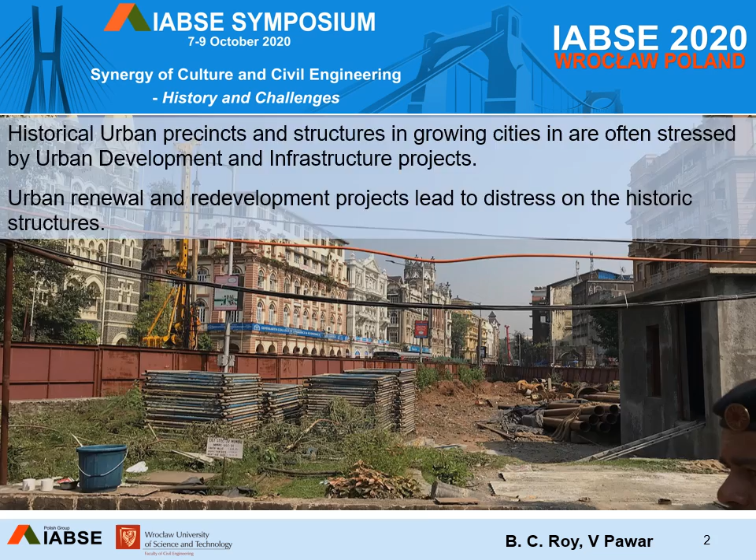The first metro in India was commissioned in Calcutta in 1984. Delhi metro started in 2002 and Mumbai metro started in 2014. Currently, metros are in operation in 10 cities, under construction in 6 cities, and in planning in 18 cities.

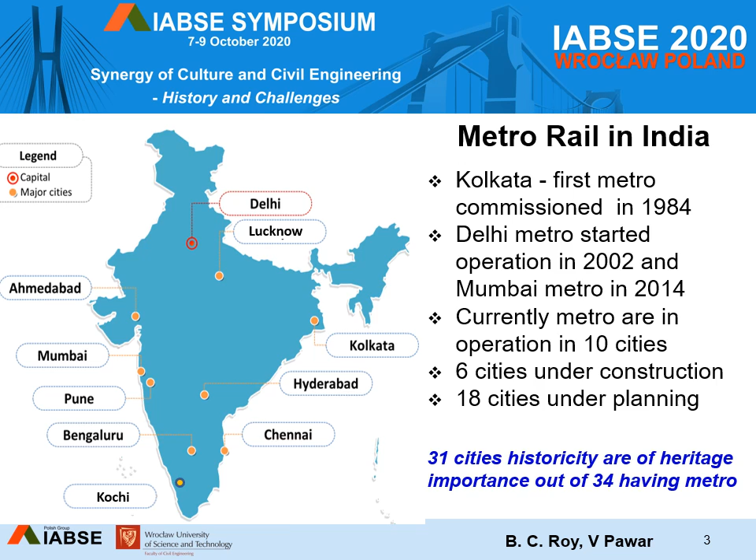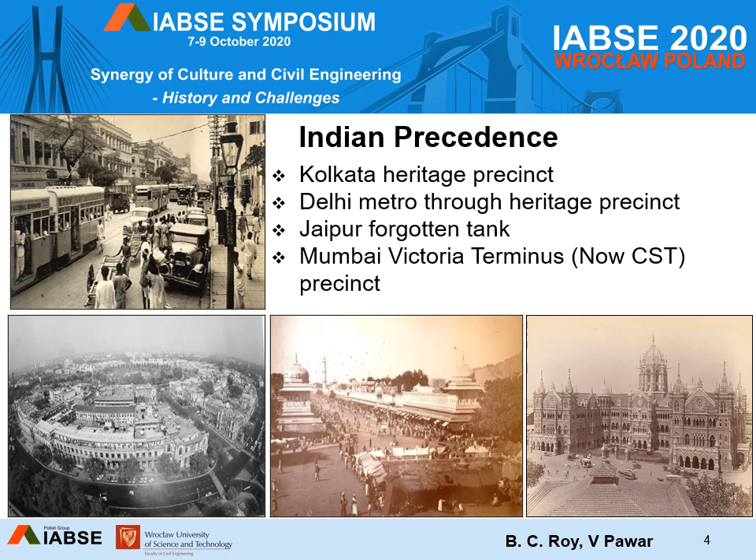Kolkata Metro is routed through historic and crowded streets. For Delhi Metro, many stations are through or near significant heritage. Jaipur Metro, where the conservation approach discovered and presented to the public a forgotten stepped water tank, and the 32-kilometer long underground Mumbai North-South Metro passing in proximity of World Heritage Structures.

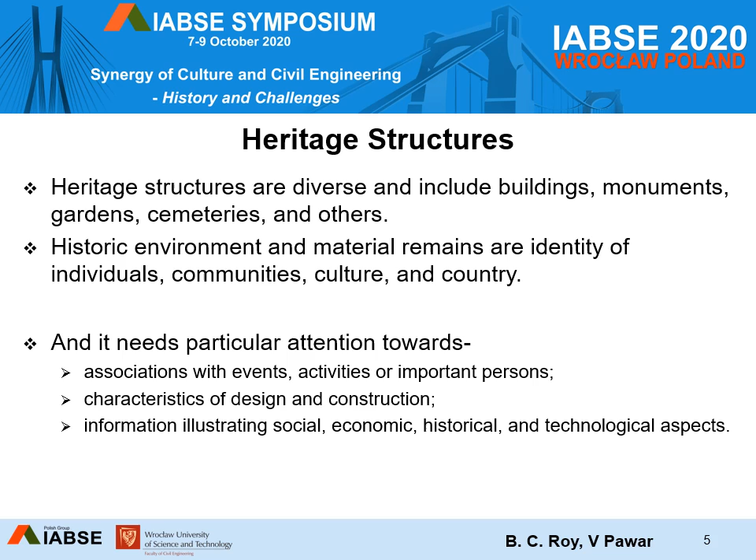Heritage structures include buildings, monuments, gardens, cemeteries, and others. The historic environment and material remains give identity to the individuals, communities, culture, and country.

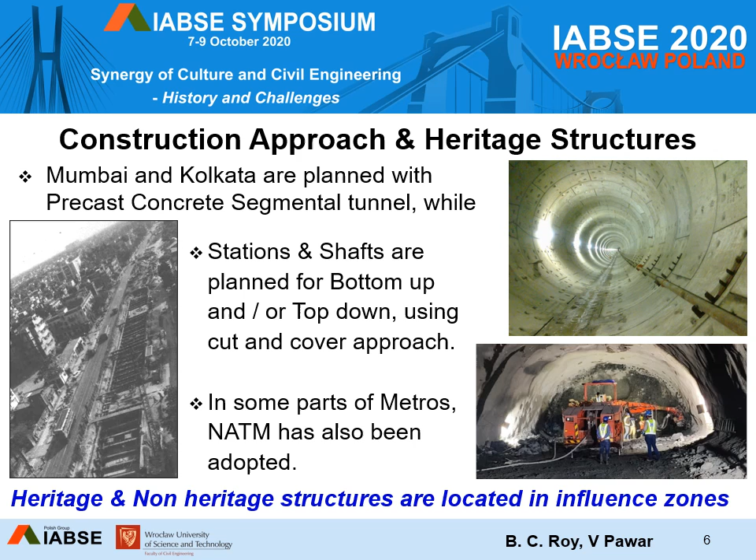Corridors for Mumbai and Kolkata Metro tunnels are planned with precast concrete segments, stations and shafts using cut and cover, bottom up or top down, and also using NATM. Selection of the appropriate tunneling method is commensurate with geotechnical conditions, with protection of existing structures.

The Kolkata tunnel is through soft silty clay, while Delhi encountered weathered quartzite and alluvium. The Jaipur tunnel is through brittle sandstone, while the Mumbai tunnel is through a stable basalt layer.

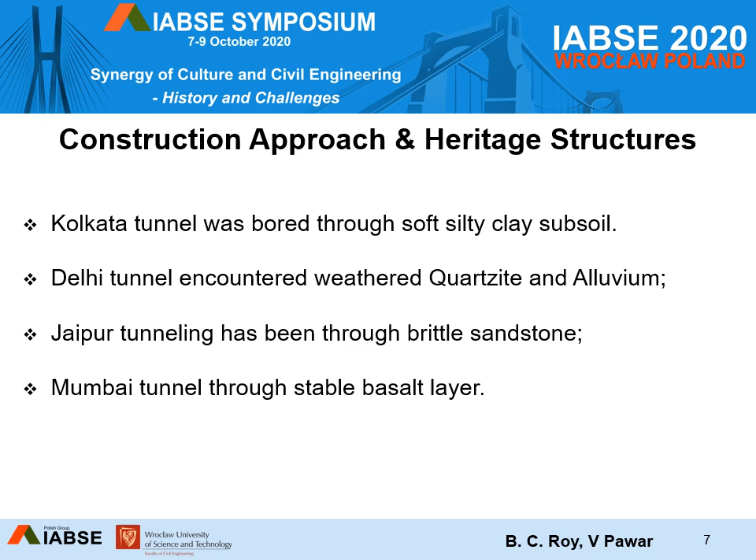Buildings were built using varied materials like brick, sandstone, basalt with steel and timber composite structure, and styles reflecting a diverse eclectic range. On this road, the business and activities include banking, legal and related services, logistics, camera and related optics and electronic equipment, hotels, departmental stores, cinema theaters, schools, colleges, hospitals, and whatnot.

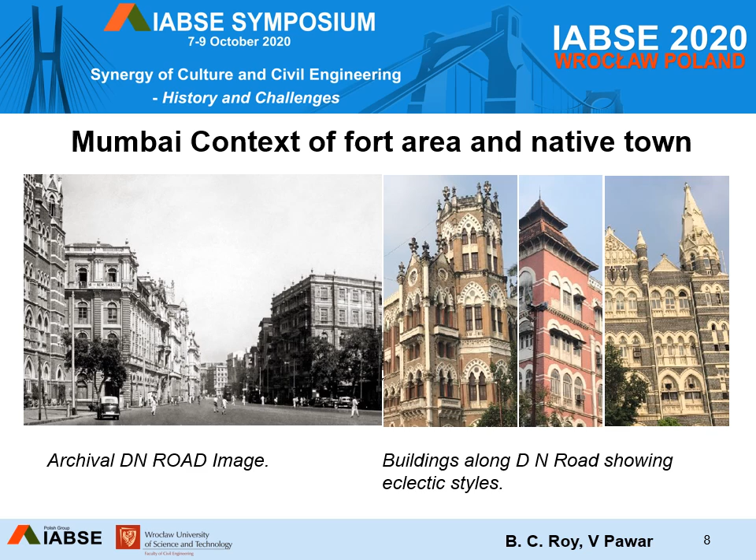Role of conservation professionals: first, evaluate the significance of heritage. Second, ensure policies and advocacy in decisions. Third, conservation of heritage ethically, scientifically, and professionally. In practice, conditions range from political to economic, social to ecological, and to technical.

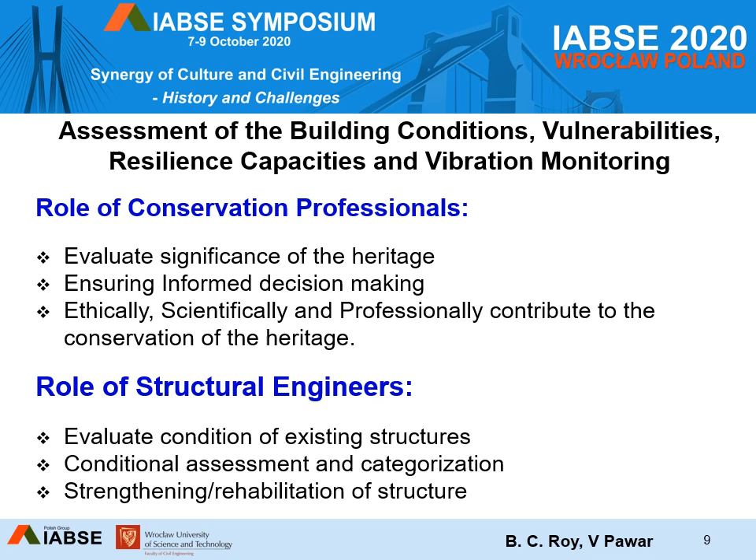For engineers: evaluation, assessment and strengthening of existing structures, assessment where damage, distress or deterioration is suspected or known. It is important to record the history of the structure, behavior and movement over time, and effects due to seasonal changes. Pre-construction photos, videos and test reports are crucial to establish the condition.

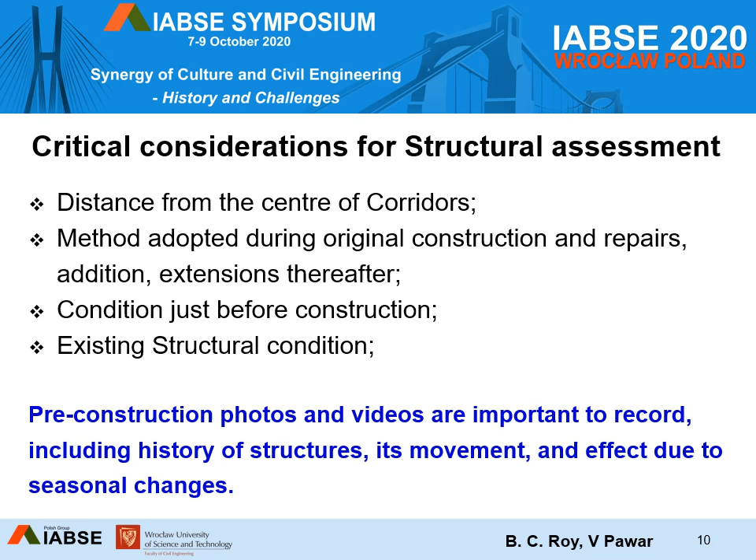Assessment where damage, distress or deterioration is suspected or known. Damage may be caused by leakage, aggressive environment, fire, impact, earthquake, severe weather, and where vulnerable materials are used. For heritage structures, the categories are grade 1, grade 2A and 2B, and grade 3.

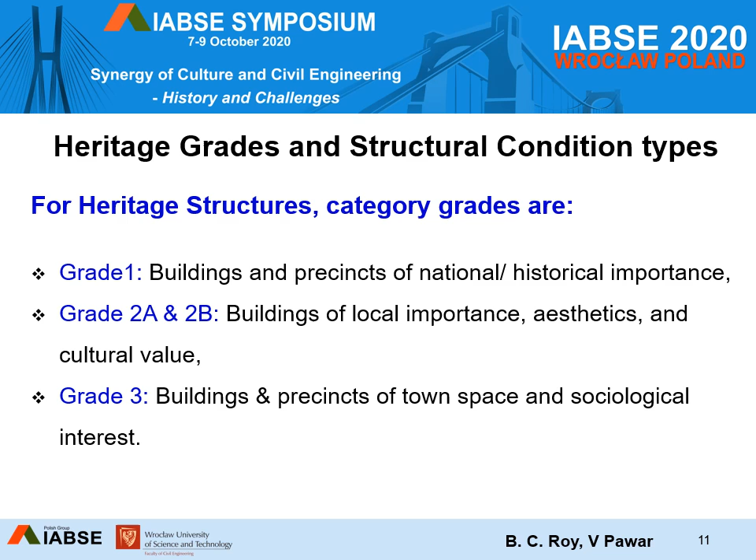Grade 1 includes buildings and precincts of national and historic importance. 2A and 2B include buildings of local importance, aesthetic and cultural value. Grade 3, buildings and precincts of townscape and sociological interest.

Heritage structures' structural condition types are of 6 types. Type 0 is practically non-structural, with non-structural cracks. Type 1 very slight, type 2 slight, type 3 moderate, that is minor cracks, sporadic spalled concrete and seepage. Type 4 severe, type 5 very severe, that is badly deteriorated load bearing structures.

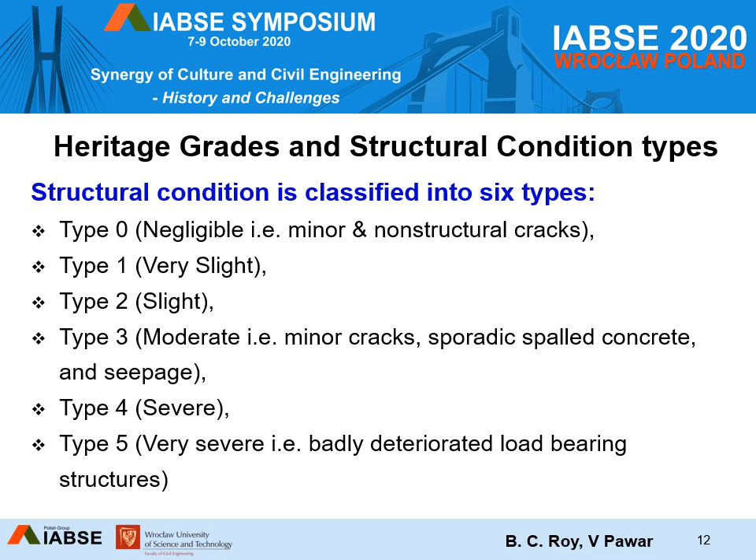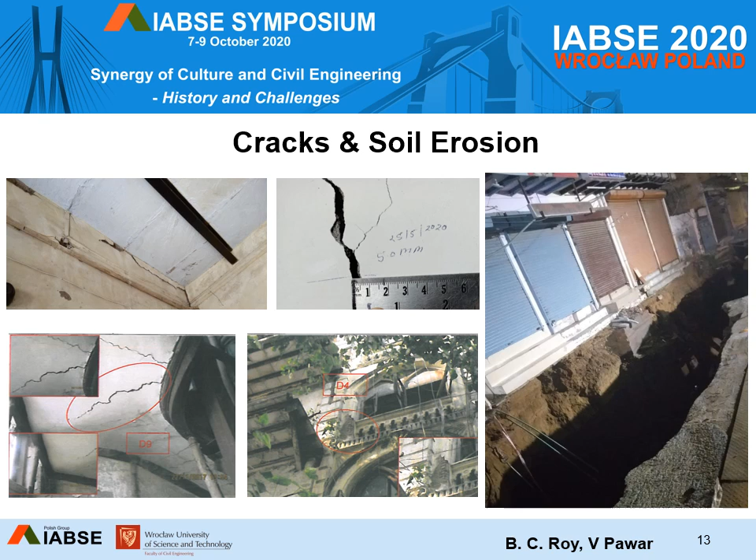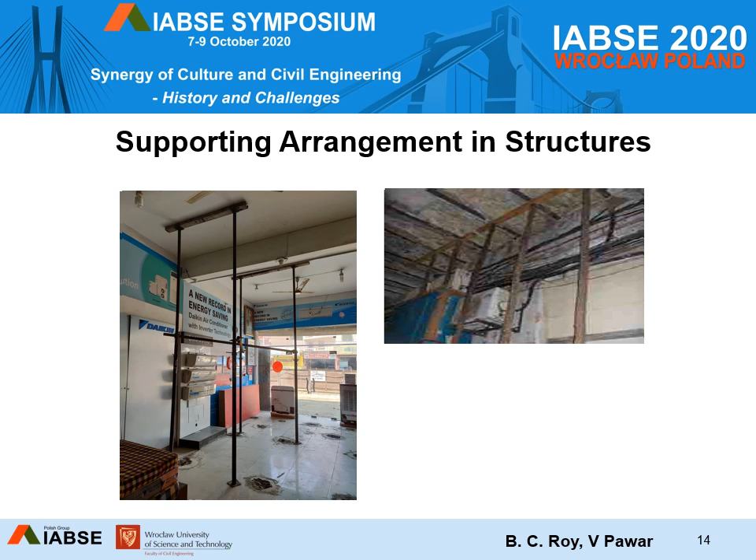During the condition survey, this being a multidisciplinary activity, professionals from all disciplines like architecture, structural, general civil, utility, electrical and power should work in tandem. Strengthening of support structures for existing buildings affected by excavation or tunneling, in situations where there is an imminent risk to the public.

Structural engineers and service engineers should contact the concerned authorities, brief them on the situation, and soon hand over a note highlighting the risk.

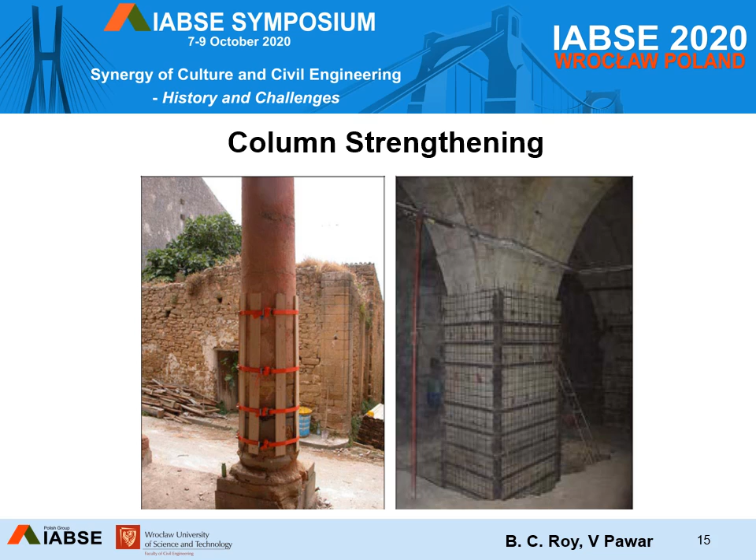The effect of underground transport system on both heritage and non-heritage structures is twofold: one during construction, the other during operations. And the possible damages are assessed as architectural, functional, and structural.

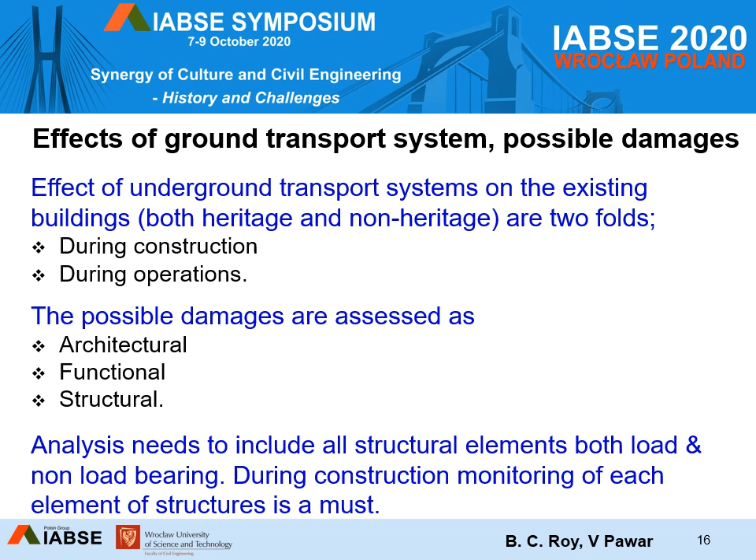Reasons for assessment, objective, methodology, anticipated difficulties, limitation of findings and deliverables. The analysis needs to include all structural elements, both load and non-load bearing. During construction, monitoring of each element of structure is a must.

Monitoring was carried out to control deformation of tunnel, ensure precise tunnel profile, evaluate appropriateness of TBM and tunneling method, assess settlement pattern both during tunneling and excavation, effect of groundwater level, and measure structural stresses.

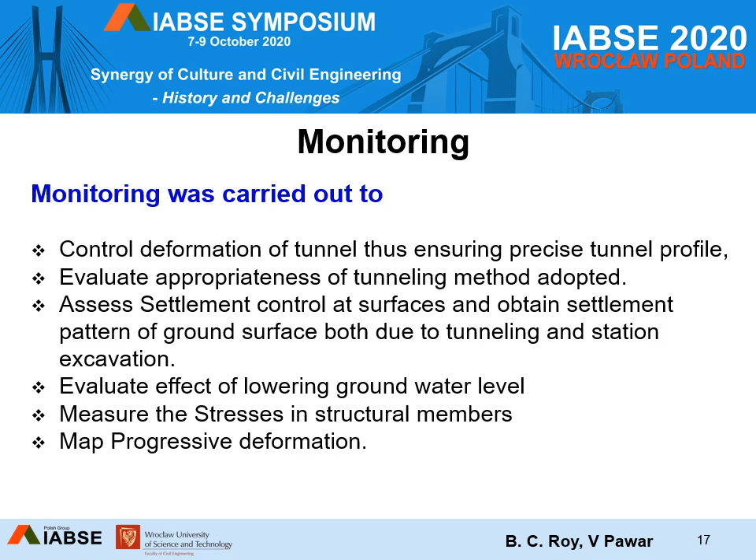Now, the assessment of effect of settlements. There are three stages. Stage 1, structures for which predicted settlement is less than 10 millimeter and the ground slope is less than 1 in 500 need not be subject to further assessment. Stage 2, structures with potential risk to exceed stage 1 were assessed individually using the limiting tensile strain approach.

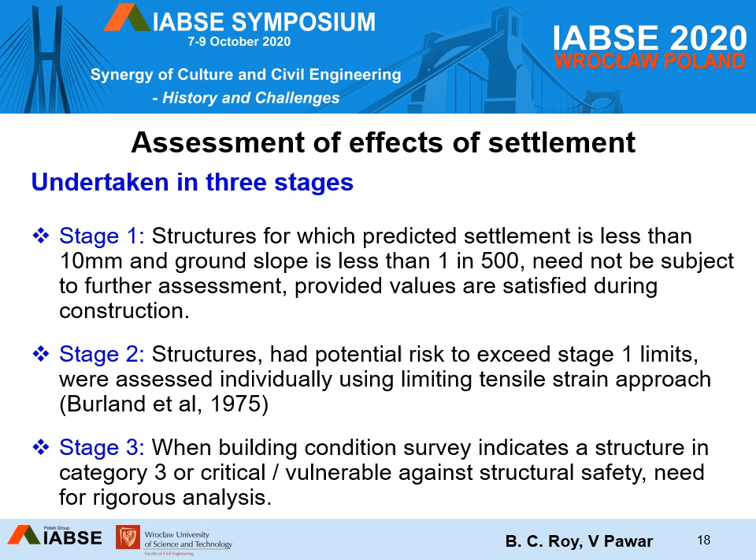Stage 3, when the building condition survey indicates a structure in category 3 or critical, vulnerable against structural safety, there is need for rigorous analysis. Effect of settlement has already all been discussed.

And now heritage conservation scope. Compared to survey, the archival data is more reliable since it incorporates buildings' arcade footprints, including the street features and building heights. Ground truthing was carried out to incorporate changes done over time since archival maps were prepared. It was used for virtually recreating the heritage character.

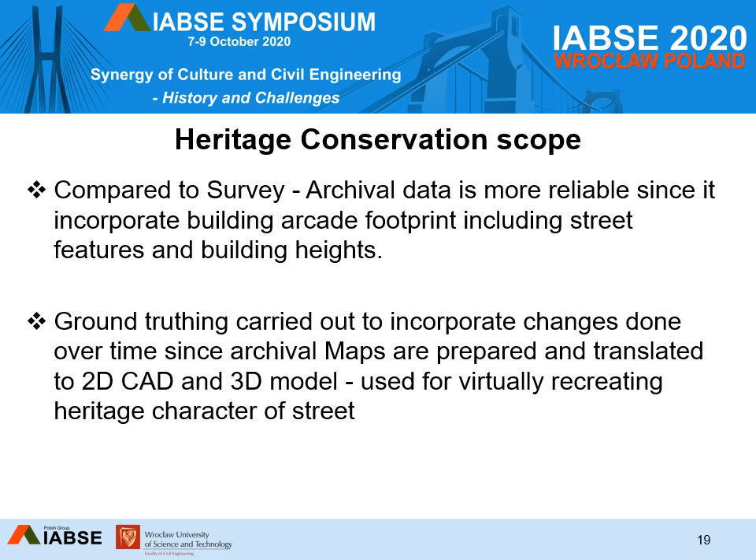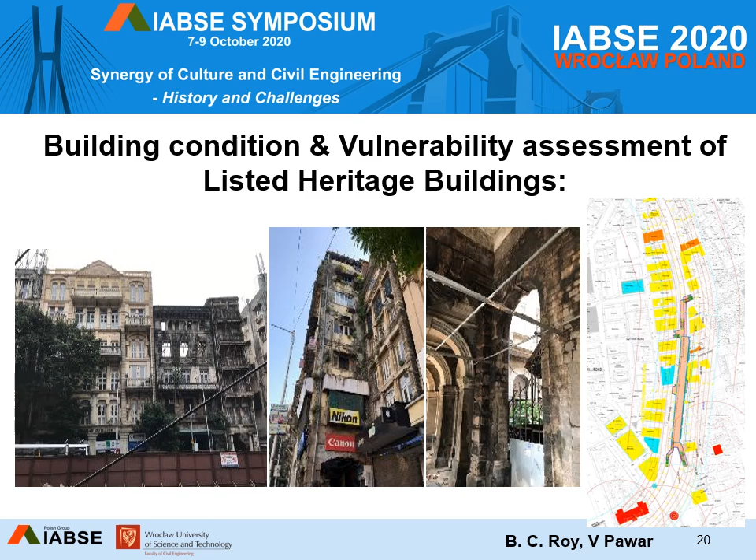Primary reason for decay may be attributed to well-meant government policies of rent control and their responsibility for these structures, mitigated through cess tax for the maintenance of these buildings. And many of the buildings have not been maintained, were poorly retrofitted for the changing lifestyles or occupancy, and are in dilapidated state.

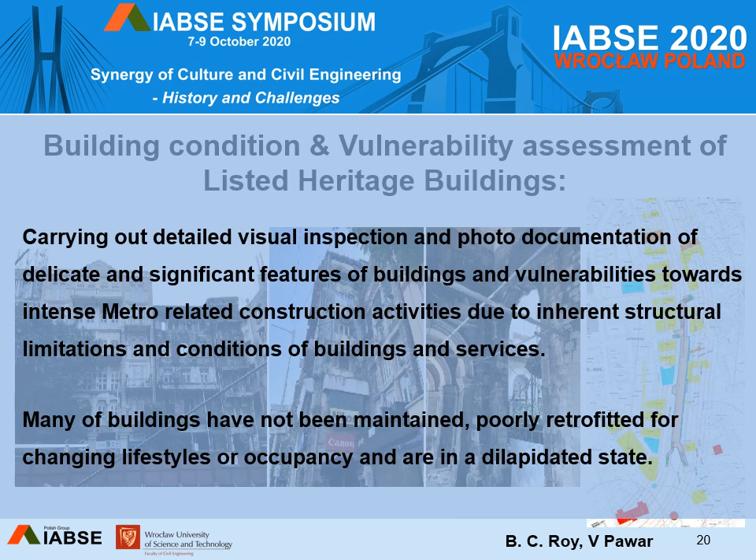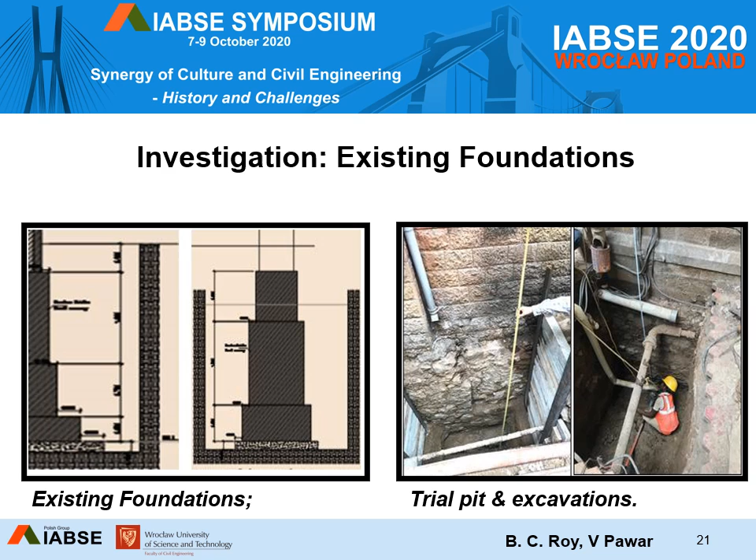Now, assessing protection of existing structures. Existing and potential damages were worked out based on ground movement, vertical and horizontal settlement. In line with experience gained from other metros, settlement for overburden of 7 meter is in the tune of 1 in 1000, that is 0.1%, which results in 7 millimeter, and horizontal in the tune of 0.15% or 10 millimeter.

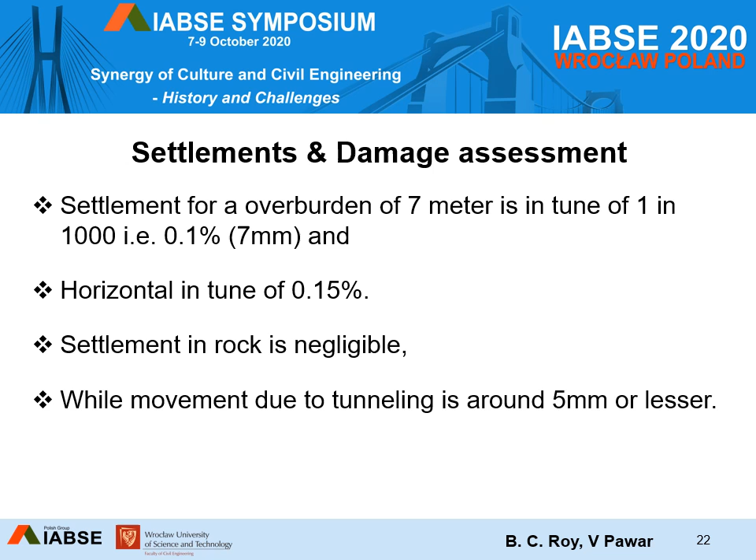Settlement in rock is negligible. Movement due to tunneling is around 5 millimeter or lesser. Instrumentation was carried out during the construction and compared with the design values. Heritage significance was recreated to facilitate better decision making.

Workflow involved the site sketches and measured documentation for 70 buildings, photography, conversion to virtual 3D model and finally renders while comparing and articulating. In brownfield, especially in context of heritage precincts, it is found that conservation is relatively new and poorly understood amongst the decision makers and hence does not receive the empathy it deserves.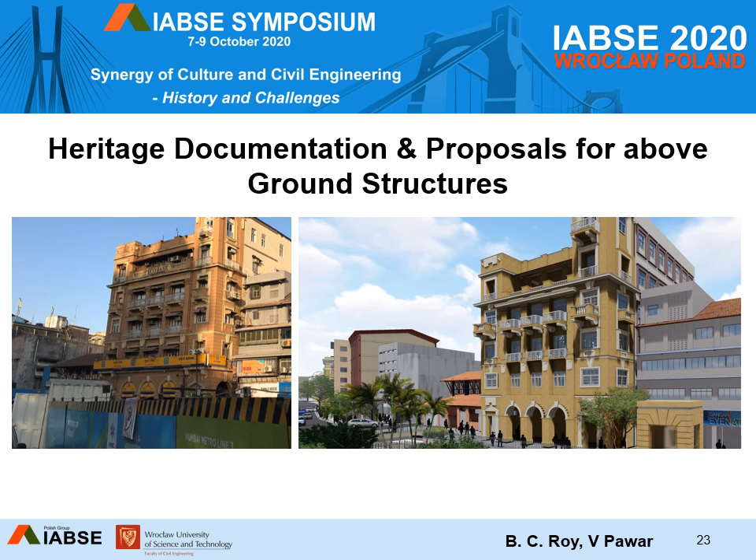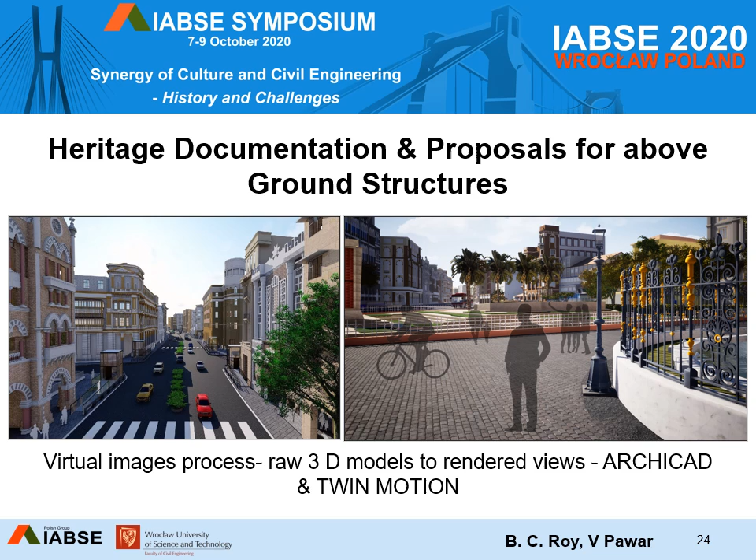In this conceptual stage, the Mumbai Metro started with a list of heritage structures which was operational. It was not a comprehensive list. Had due diligence been done, holistic scopes drawn for heritage precincts and properties, the magnitude of scope of the heritage architect could have been clearer and would have been apparent in the initial stage itself, and the work could have been faster and better.

Now, infrastructure projects like Metro Rail include the onus of vulnerability assessment and protection of vulnerable assets. To be able to fulfill this requirement, the role of architectural drawings of buildings becomes extremely important. These should not be restricted to facades of the buildings facing the alignment corridor alone, but should include the whole of the building, including especially services. Structural assessment and appropriate rehabilitation and strengthening measures are essential.